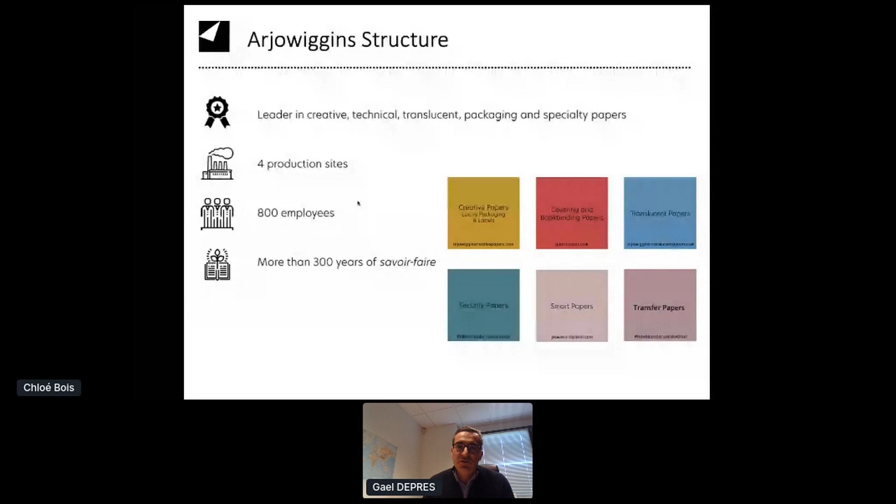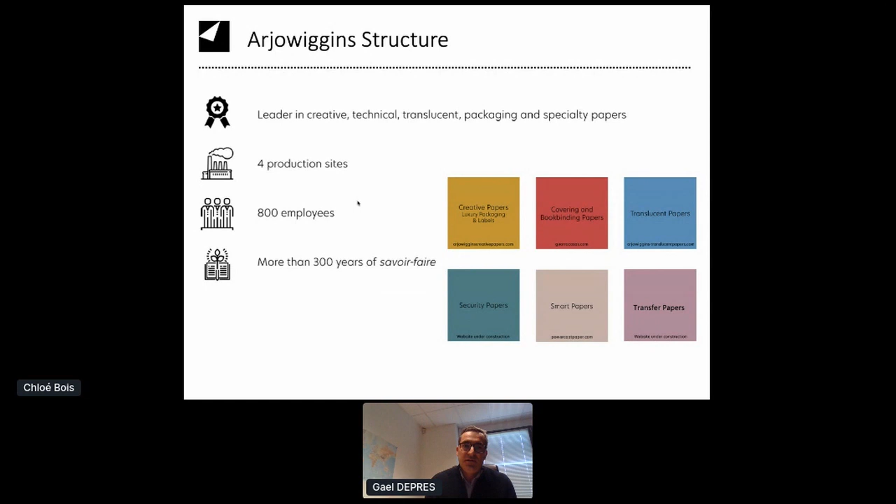A few slides on Arjo Wiggins, because it has changed a few years ago. Arjo Wiggins is now a smaller company. We focus on luxury packaging, translucent paper, bookbinding papers, security papers, transfer papers, and also smart papers. We are a little bit less than 1,000 employees, with 4 production sites.

We are mainly focused in Europe, with 1 mill in Scotland, 1 mill in England, another factory in Spain near Barcelona, and another one in China.

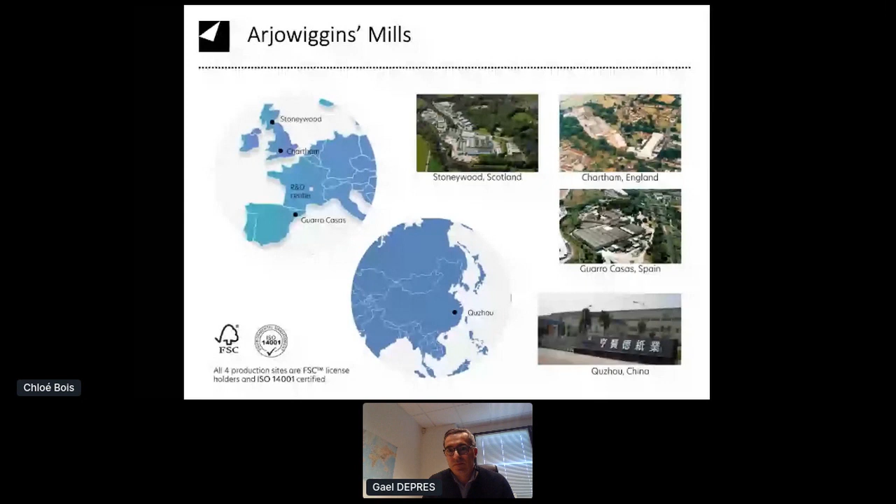Now I will focus on smart papers. For a few years now, we are paper inlay manufacturers. That is to say we produce paper, special paper for printed electronics, but we also print electronics in small reels with our 4 heads flexo machine.

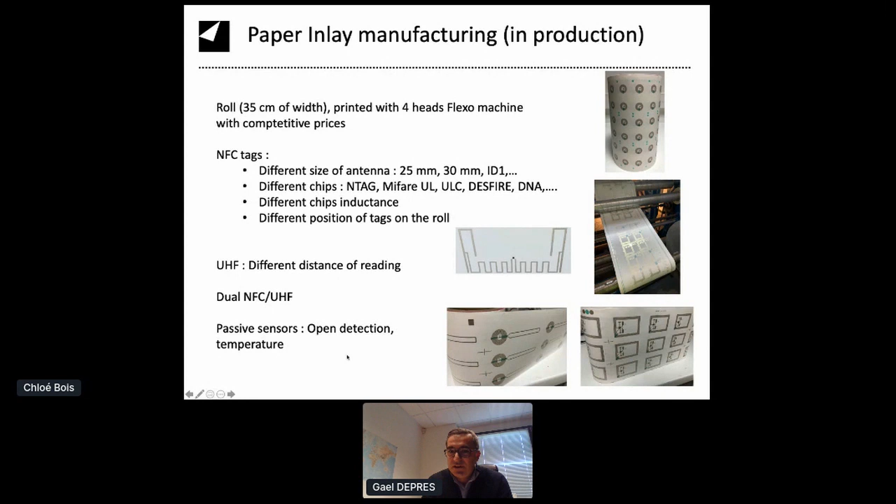With a few products now, the main one is NFC tags with different sizes and different chips for manufacturers. We also produce UHF with different reading distances, dual NFC UHF. And we are also working at the moment on some passive sensors, open detection and temperature sensors. Passive meaning without any battery yet.

In R&D, we are working on a lot of subjects at the moment. We have a research center in Grenoble, where I work, in France. We have at lab scale and pilot scale flexo and screen printing machines. We are working on electrochromic printed displays, printed batteries, some active sensors, especially temperature, but also shock, humidity, and pH. We're working a little on smart textile and on selective electromagnetic shielding and amplification.

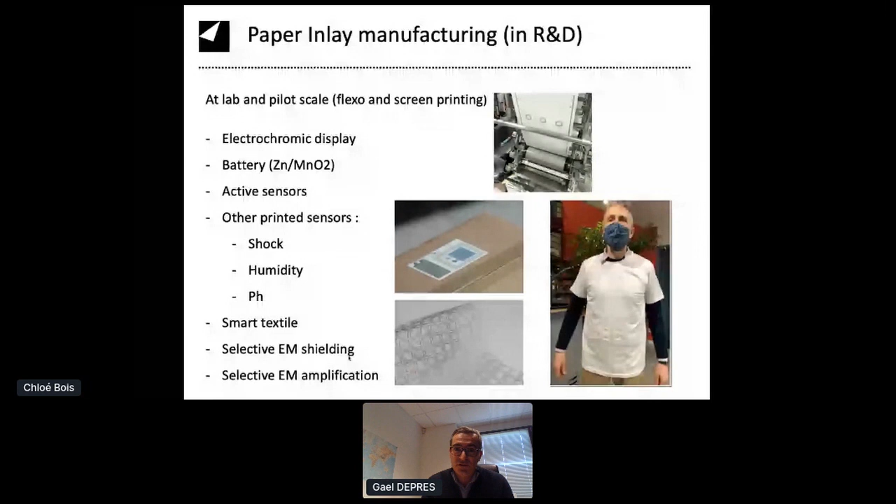As a paper electronic producer, we wanted to know the recyclability of our product. So I have hopefully the same data as the previous speaker. That's good. More than 50 million tons of e-waste produced in the world per year. And also some data which are not very nice.

It's about production of plastic waste in the world, which is almost the same data as e-waste. Only a few percent of plastic is recycled or incinerated, and most of the plastic accumulates in the natural environment, which is a bit of a shame.

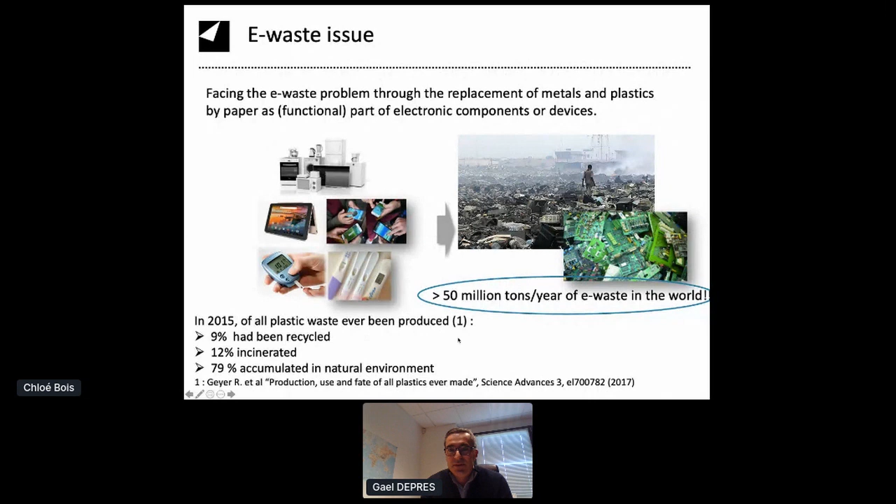So why could paper be a solution? First, because paper is made of cellulose, and cellulose is a major biopolymer on Earth. It's biodegradable, renewable, and most paper is recyclable. There is an existing process to recycle paper and board. So it's really interesting, and we wanted to know if, when we print electronics, could it still be considered recyclable?

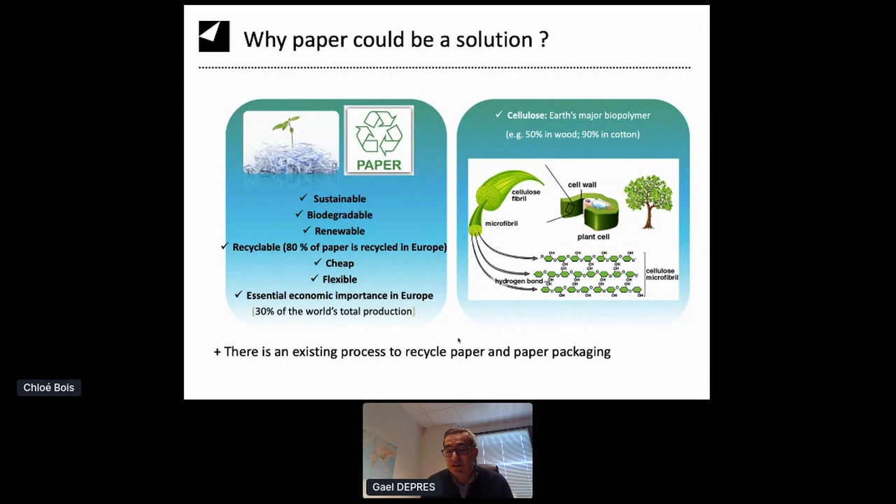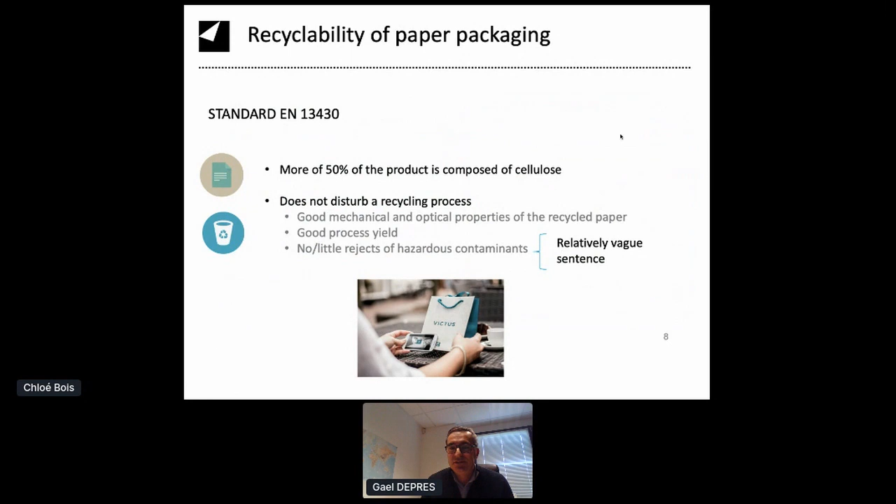In Europe, we have some standards on paper and board packaging. To be recyclable, we need to have more than 50% cellulose fibers inside, and we need to not disturb the recycling process, keep good mechanical and optical properties of the recycled paper, a good process yield, and no or little reject of hazardous contaminants, which is a relatively vague sentence.

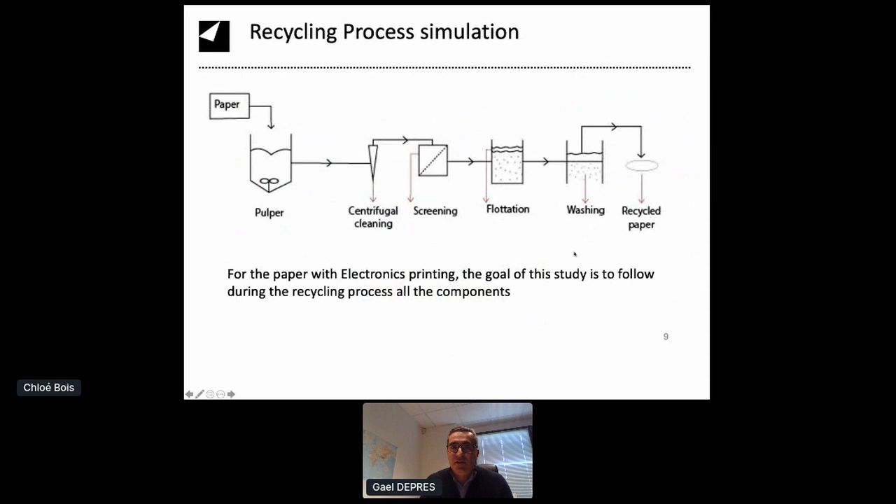So what we have done: we have simulated in a pilot the different processes to replicate the recycling of paper and board. We have pulping, some centrifugal cleaning, screening, de-inking, washing, and then at the end we have the recycled fibers.

We first disintegrate the paper with the lab pulper. Then we use a screening equipment named Somerville with a defined slot gap. Then we de-ink with the de-inking apparatus where you have air bubbles and tensioactive materials to separate the hydrophilic and the hydrophobic materials.

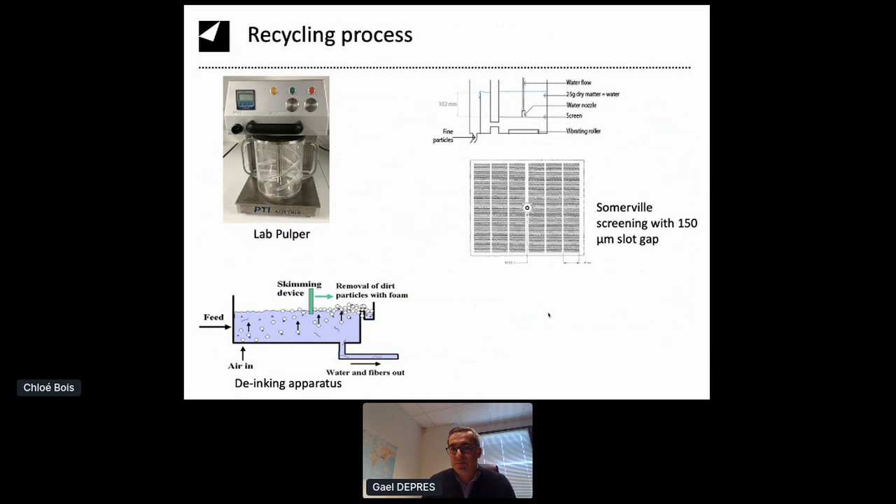As materials, we used two complex prototypes coming from an EU project: anti-counterfeiting labels and a shock detection tag to check shocks during transportation, in collaboration with some partners. For the last prototype, we do not take into account the battery, since at the moment it's not a recyclable battery. It will be removed at the end of life of the tag.

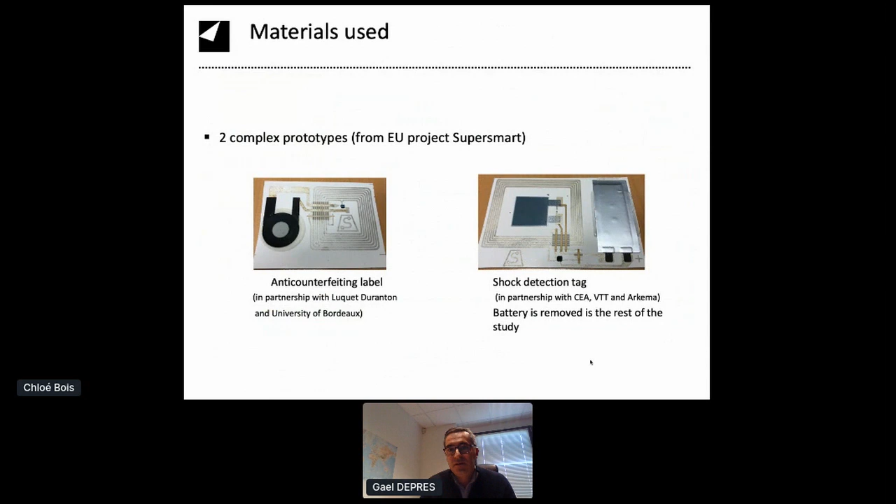Okay. For each step, the first step, we print each material, each ink, on paper with the same ratio, 4%. And it passes through the different processes. So we have the silver, PEDOT:PSS, carbon, piezoelectric polymer, and so on, and also chips. Next.

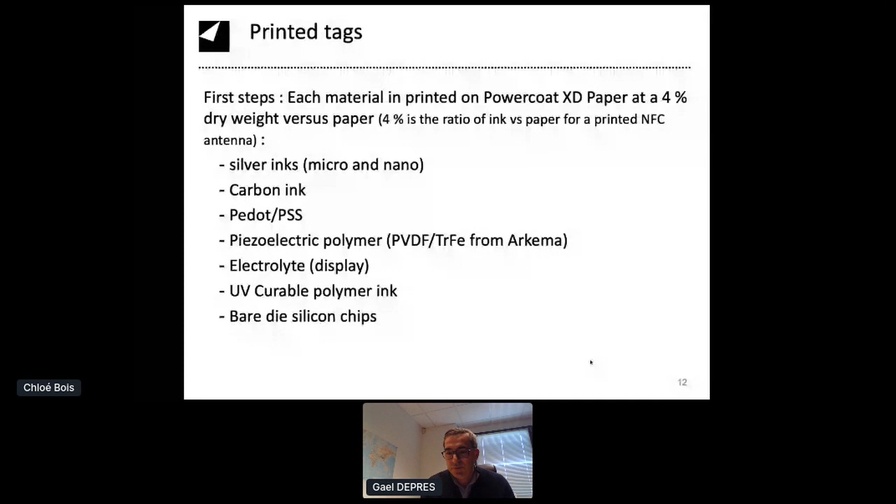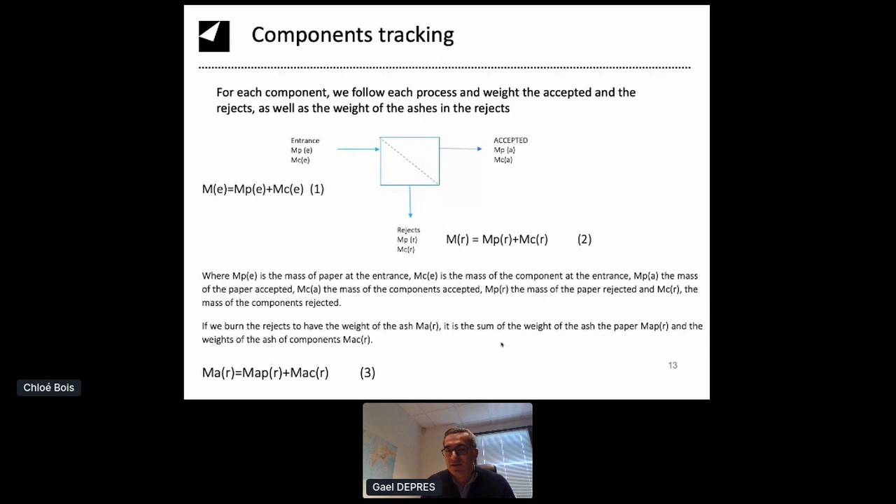And then for each process, for instance, for the screening, we simulate it as a black box. We have what is at the entrance, paper plus component, what is accepted, what is rejected. So we focus on the rejection part, and we have the mass balance. And on the reject, we also burn the reject to have the ash content. And in fact, we have the mass balance on the ash content also. Next, please.

And by preliminary tests, we know the ash content of each component, ink and paper and so on. And by combining equations, if the ash content of the paper is different from the ash content of each component, we have a final equation that gives you the reject ratio of each component. Next, please.

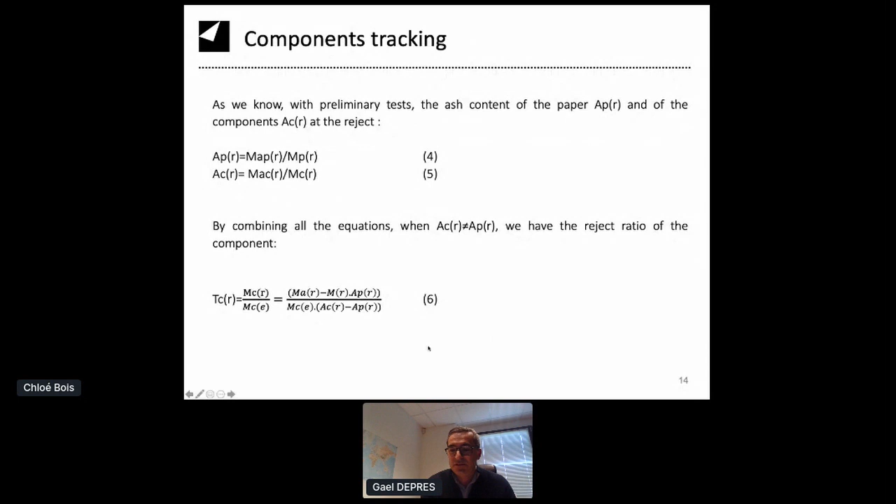And we have, for the two demonstrators, for each component, the reject ratio for the screening, for the de-inking, and the total reject ratio. And what we see first is most of the components are well separated and extracted by filtration or de-inking. And at the end, we have a quite high reject ratio of the components and a good acceptance of the paper itself. So that is a first good result, that by existing processes, we know how to separate the components.

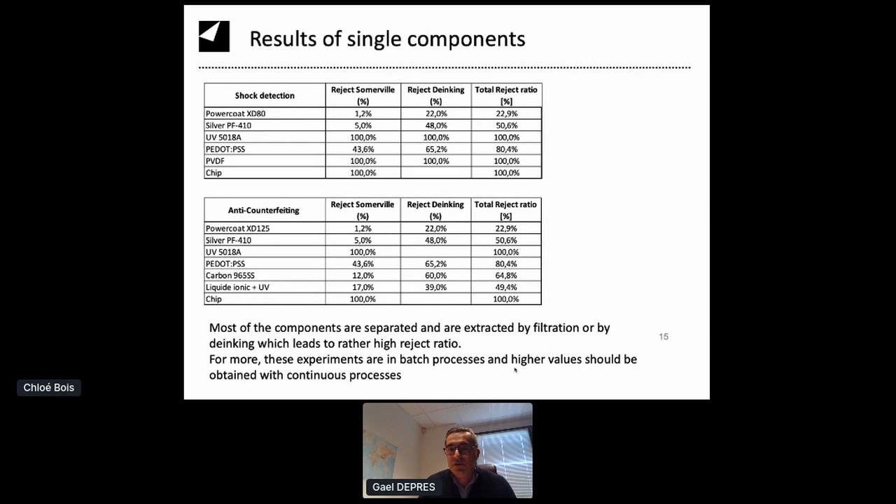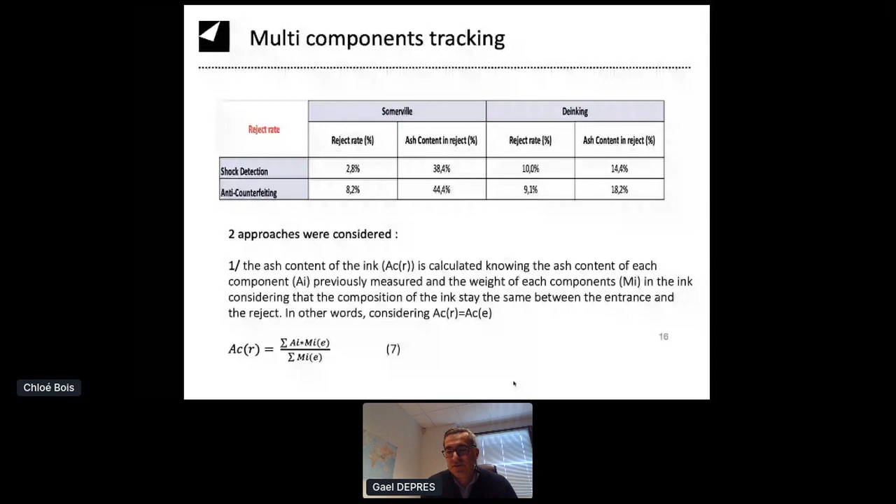We have a second hypothesis where we took into account the reject ratio of each component and the ash content of each component. And we have a second equation that allows us to calculate the ash content of both full demonstrators. So the two equations lead to quite good results, and I will explain more in the next slide.

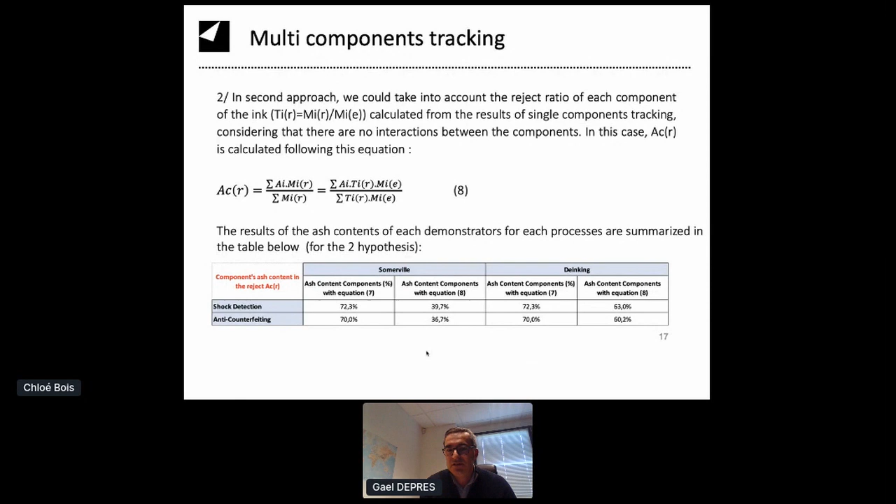Yes, okay. We have at the end, for the two complex demonstrators, for each process, the screening and the de-inking, a reject ratio, which is calculated by the two equations. For the anti-counterfeiting label, the two equations fit very well, and we have an average reject ratio of the ink of more than 90%, which is what we want. We want to extract the inks from the paper.

For the shock detection, it's a little bit less. We have only 40%, which is removed mainly by screening. But we need to continue the tests, because even for the de-inking, we have 0% reject ratio, but the foam from the de-inking is a little bit gray, so we don't understand everything at the moment.

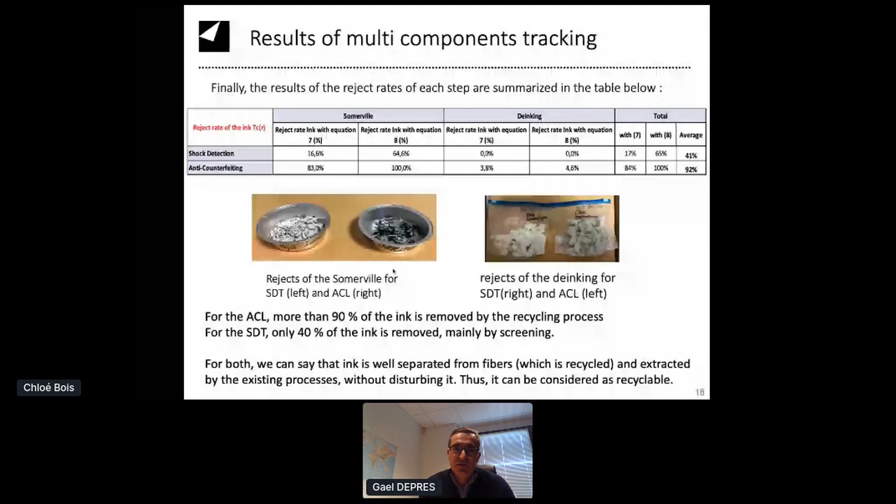But for both, we can say that the ink is well separated from the fibers, which is what we want. And it doesn't disturb, even at high quantity, because 4% is quite a lot. It doesn't disturb the recycling process. Thus, it can be considered as recyclable. And there is, of course, no dangerous chemical. The most problematic chemical is the silver, and we need to lower the silver content in our ink. And next, please. I think it's my last slide.

Yes. So the conclusion is we produce printed electronics on paper. We developed some methods to track all the components during the existing recycling process. And we prove that they are well separated. The inks are well separated from the paper, and thus printed electronics could be a very interesting process to reduce e-waste, because it can be considered as recyclable, and it's much better than doing it on plastic.